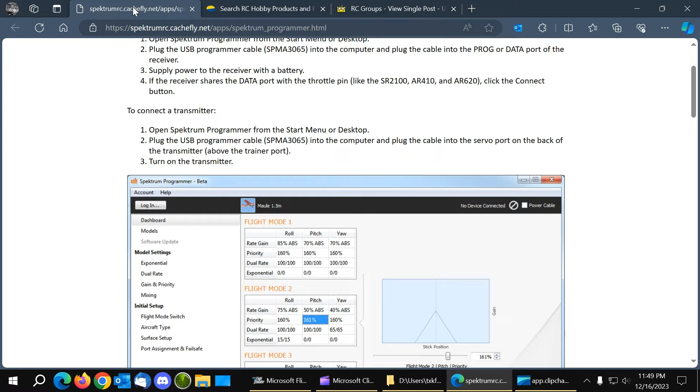He's the one that figured out how to do the reprogramming on AR636s, and also wrote this software to reconfigure the smart receivers that came after the AR636. So what I'm going to do is I'm going to run the Spektrum Programmer software. And so there's no Timber here, or not Timber, but Valiant.

And since the receiver's in the airplane and it has servos connected to it, the servos would draw too much current to run it off of the USB port. So instead of checking that box, I'm going to plug the battery in on the plane. And of course, having this software up and running when I plug up the receiver to power, the receiver is going to automatically connect. So you'll see that in a second.

Okay, so it connected. It shows cable and device connected up here, and it's showing us this. Now you need to be real careful with this menu right here, this box. You want to use the device settings, but you don't want to overwrite a model that you already have. So new model is okay. If it had the name of one that already existed, then you would click show all, and you would pick new model instead of one of these and tell it use device settings.

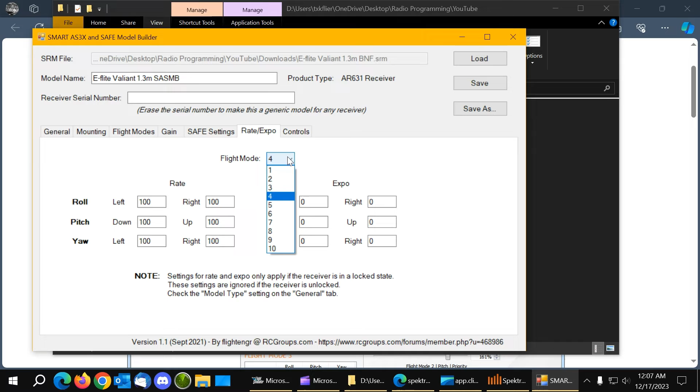So that's that. And then the control tab. Horizon, on bind-and-flies, you have to leave the servo reversing set to normal. You don't want to reverse any channels in your transmitter. They do the reversing in the receiver.

However, if you reset the receiver and program it from scratch yourself, you have to reverse any channel that's backwards when you move the sticks, and then run the relearn servo settings in forward programming so that it tells the receiver that you've reversed a channel and what the sub trim is and stuff like that.

But from looking at this, I know when I program this receiver from scratch manually, that I'm going to have to go into the aileron channel and reverse it, and go into the rudder channel and reverse it in my transmitter. So, I might make a note of this, or I'm just going to check the airplane, and look and see what's reversed and change it, and then do the relearn servo settings in the receiver.

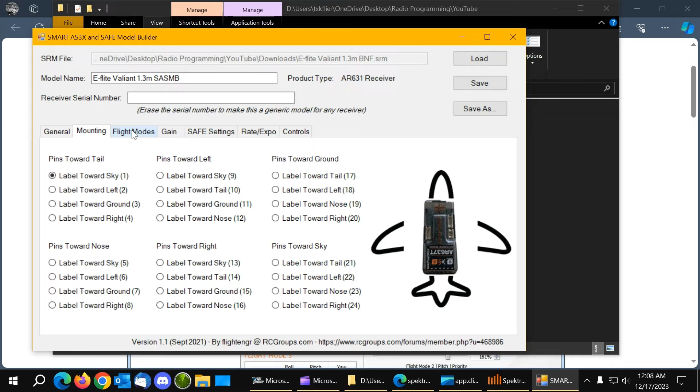So to set this up for me, I'm going to use channel 7 because it's a 6-channel receiver. 3 flight modes. I'm going to unlock it. Safe is enabled. Mounting, I don't need to change it. Flight modes, what I do on mine is flight mode 1, safe is inhibited and AS3X is on. And these don't need to be on. And these don't matter.

So flight mode 1 in my setups is low rates with AS3X because I put them on the same switch. The dual rates and the flight modes in the receiver, I put them on the same switch. I don't have a way to turn the gyro off. I don't really want to turn it off. And in flight mode 2, it's going to be AS3X and doesn't need these 3, and these don't matter.

In flight mode 3, this is where I'm going to turn self-level on and AS3X on. So my safe mode is going to be on the opposite end of the switch. It's going to be flight mode 3. And I can just leave high throttle disabled instead of changing it to 0 in that other screen. But you can leave it active.

Now the bank angle, I've got to set these. The slower the airplane is, the lower these can be, because a slow airplane doesn't need to bank much to turn in the width of a field. The faster it is, if it's an EDF, then you're going to need to put 85 degrees here so that the wing is almost vertical when you got the stick all the way over against the stop.

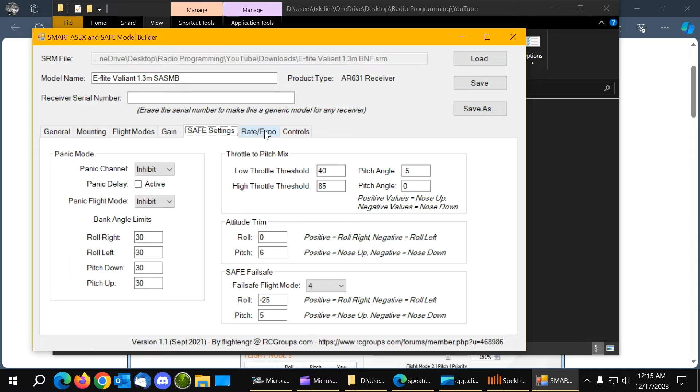Okay, panic doesn't matter. And this is already set to 0. And that's -5. We've already done this screen, so we're good here. And then these don't matter because the receiver is unlocked. So now I'm going to highlight the name and hit Control-C and copy it. And then I'm going to do Save As, and I'm going to do Control-V and paste that name in here and save it. Now I can get out of this.

I can go back to the Spektrum programmer, and I can import that file, which is right there. And there's the file. Now, to write that file to the receiver, I click Select, and it just wrote it to it. So now my receiver's programmed the way I want it instead of the way Horizon did it.

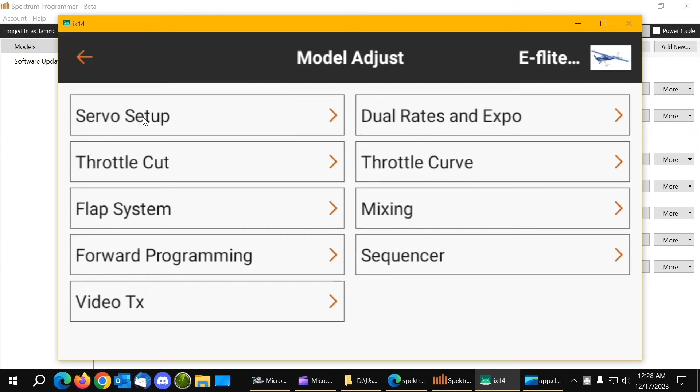The next thing I need to do is go into the transmitter settings and reverse the channels that Horizon had reversed in the receiver. So we go to the transmitter and go into Model Adjust and Setup, Servo Setup, and reverse the ailerons and the rudder.

And then in dual rates, what I do is I use switch B position 0 as low rates with AS3X. And normally I set the expo to 1/4 to 1/3 of what the rate is. And so I would set this to like 15 or 20. And then in the mid position, that's my high rates, which is 100%. Then I would set that to like 25. And then the third position is safe mode. And I would also set these to 25.

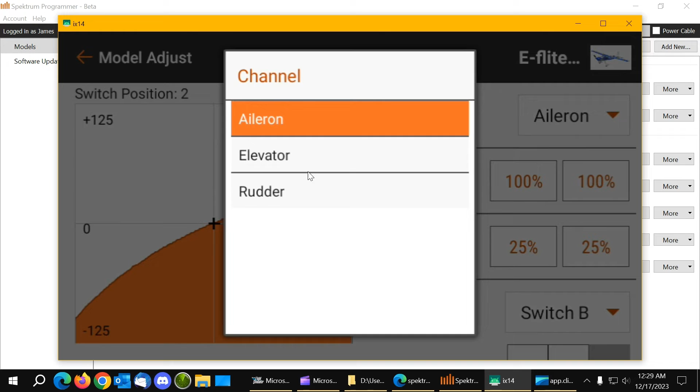So now you've got low rates with 70 and 20. High rates is 100 with 25%. Safe mode is 100 with 25. So now we go to the elevator. And this is low rate. And I would set this to maybe 75. Let's go to 80. I don't like to turn the elevator down to 70 on the first flight. So 1/4 of 80 would be 20. So we'll slide this over to 20.

And then mid position is high rates. And we'll set that to 1/4 of 100, which is 25. And then we'll go to the safe mode switch setting, and we'll set those to 25. And so now we've got 80 and 20, 100 with 25 in high rates. Safe mode's 100% with 25.

So now we go to the rudder, and the rudder, I'm going to use 75. The book value is 70, but I'm going to use 75. And then I'm going to use 20 here. And high rates, mid position, I'm going to use 25 there. And then safe mode, I'm going to set that to 25% expo.

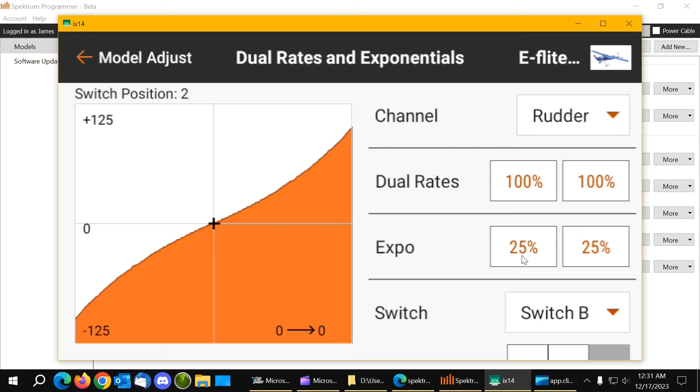So now we've got 75 and 20 for low, 100 with 25 for high rates. Safe mode is 100 with 25. So that's the dual rates.

So now, anytime you go into the servo setup and change the direction or the travel or the sub trim on a smart AS3X SAFE receiver, you need to go into forward programming and, let's see, relearn servo settings. It's under system setup. So you go to gyro settings, system setup, and click relearn servo settings. Click apply and then complete. And now we've told the receiver how the transmitter is set up. You must do that anytime you make a change in the servo settings.

Now looking at the gyro settings, AS3X, flight mode 1, we've got 25, 35, and 45. High rates, we've got 25, 35, and 45. Oops, it's not changing flight modes. Now let's see, what did I do? F mode setup.

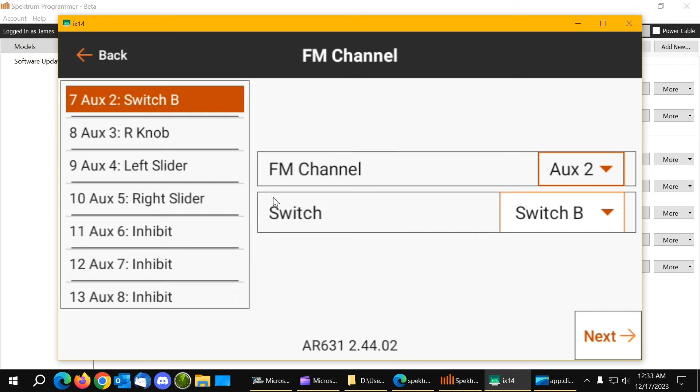See what channel I'm on. We're on switch B, we're not on C. I had it set to the separate switch from the rates because I had it set up for one position that had the gyro disabled and one that was AS3X and one that was safe. So I always put the receiver flight modes on B so that they change with the rates.

So now, flight mode 1, flight mode 2, safe mode. Okay. So here's where you got to do all this flipping. You got to check every flight mode when you do this forward programming. So this is low rates, which is my flight mode 1. AS3X is on, safe is off, panic's off. All these mixes are off. You don't need them.

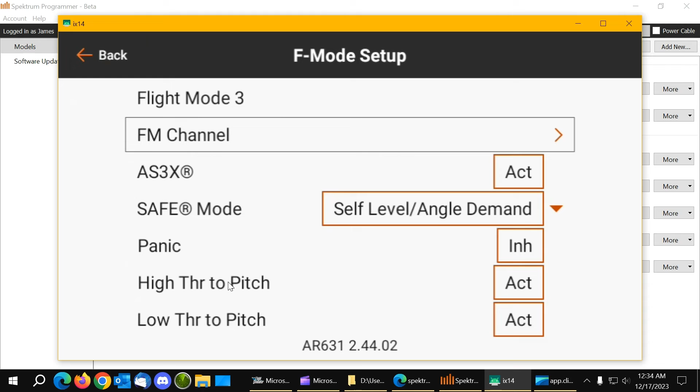The middle position is high rates. AS3X is on, safe is off. All of these are off. Flight mode 3 is my safe position. And so AS3X is active like it ought to be when safe is. And we got self-level angle demand. Panic is inhibited. The throttle to pitch mixes are both active, but I've got the high throttle set to 0 so that my plane doesn't climb at full throttle.

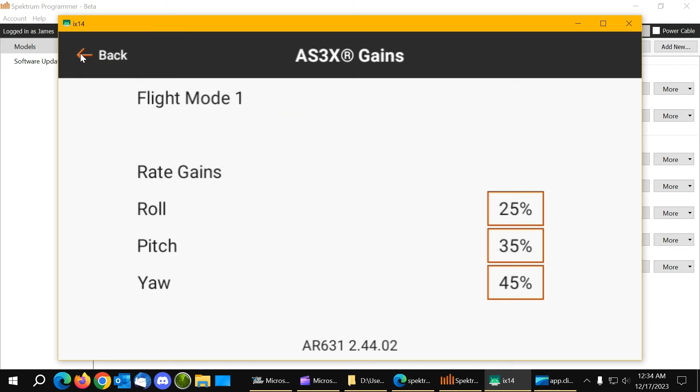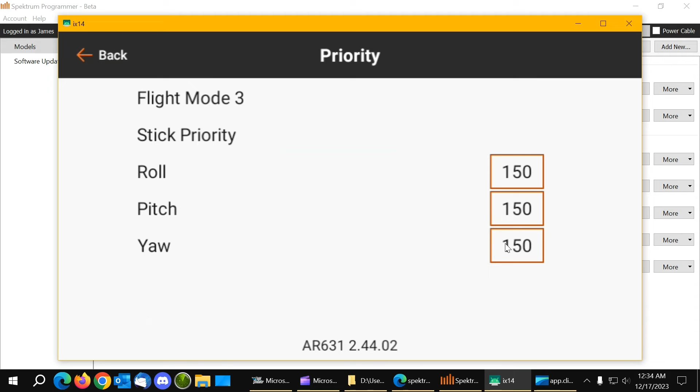So we go back, we go to AS3X settings again, and flight mode 1, we've got our 3 rates. Flight mode 2, same 3 rates. Safe mode, same 3 rates. So that's those. And then priority, flight mode 1, which is low rates, they're all 150. High rates is flight mode 2, and they're 150. And flight mode 3, which is safe mode, they're all set to 150. So there's many screens you got to go through and flip the switch to all 3 flight modes.

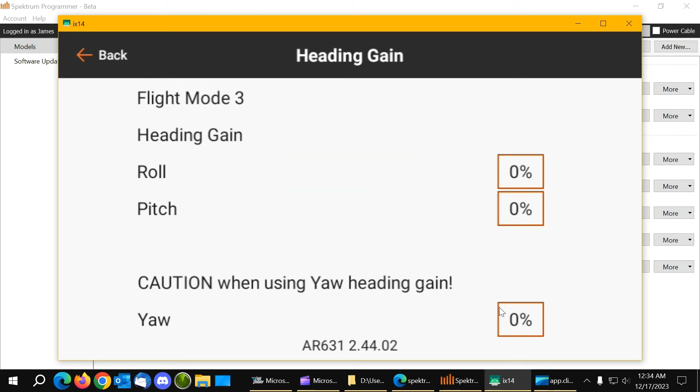Heading gain is 0 because I don't use it, although it does work good, but you don't want to put it on the rudder. So they're all disabled like they should be. And this is where you change it from fixed to adjustable gain, but as we saw in Spektrum Programmer software, they were not set to adjustable, so they are set to fixed. And here again, you got to flip the switch and look at every flight mode. So there's high rates, and they're set to fixed, and safe mode they're set to fixed. So you've got to flip the switch in just about every screen that shows flight mode at the top.

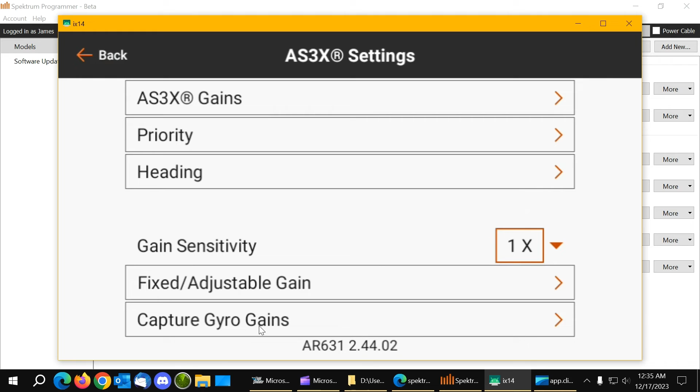And of course, this is where you would capture the gyro gains if you were using a knob on a separate channel to adjust the gains, but I don't do that. It's so easy to change the gains. You can make a lap or two around the field and see how it flies. You can land and hit the throttle cut and make a change and take off and go again or try it again with different gains. So I don't use variable gains.

Here's the safe gains. In flight mode 1 is AS3X without safe. This is flight mode 2, which is high rates, AS3X, so there's no safe. And then flight mode 3 is my safe mode, and there's my roll gain and my pitch gain. And then angle limits. Flight mode 1 doesn't use them because safe is disabled. It's my low rates with AS3X. Flight mode 2 is high rates with AS3X and no safe.

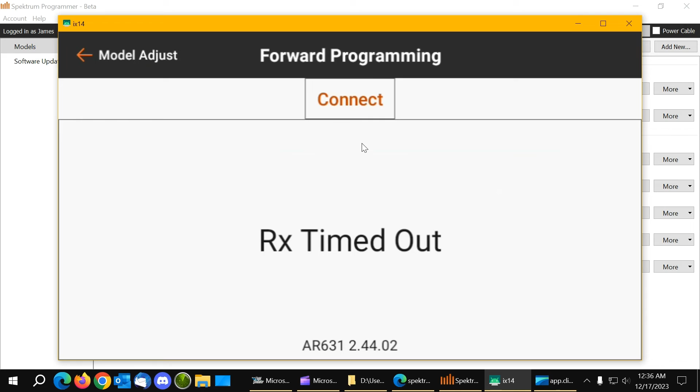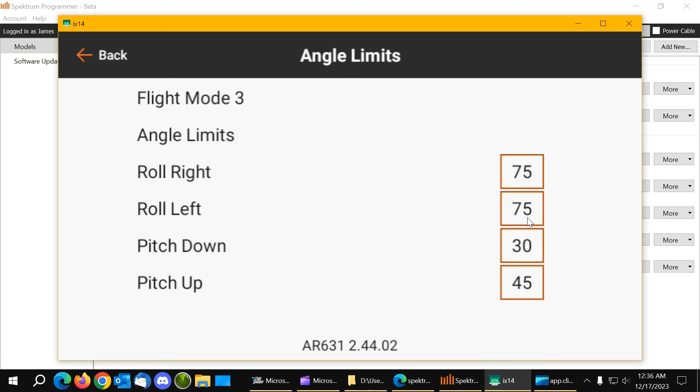And okay, sometimes it does that. It bails out on you. Okay, flight mode 3, there's my safe gains. What was I doing? Angle limits, wasn't I? Okay, flight mode 3, there's my angle limits. So 75 left and right, 30 down, 45 up.

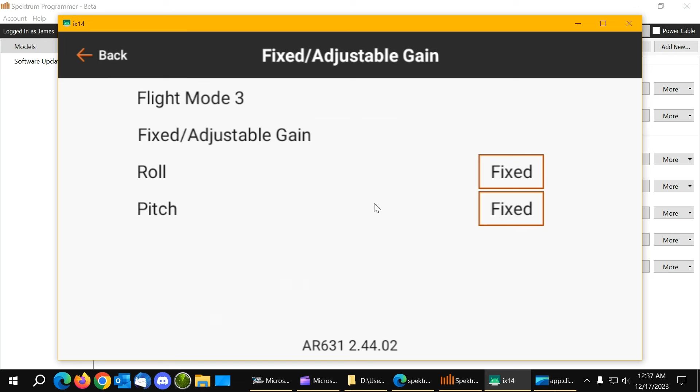Fixed adjustable. These default to fixed, so you know they're going to be set correctly. Whereas if you do a first time setup on one of these receivers after resetting it, the AS3X gains are going to be set to adjustable. And if you don't set up a gain channel, you're not going to have any gains. So you got to make sure you set the AS3X gains to fixed if you're not going to set up a gain channel.

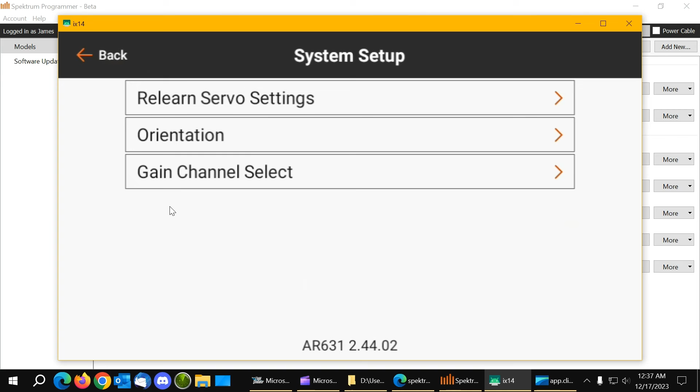F mode setup, we were already in there, but it's still good. System setup, orientation should be correct. Gain channel select, I'm not using it. Safe panic mode, this is where you can enable it, but it's inhibited. You don't need it if you've got safe. This is the throttle to pitch mix, and you see I've got it set for 0 on the high throttle and -5 on the low.

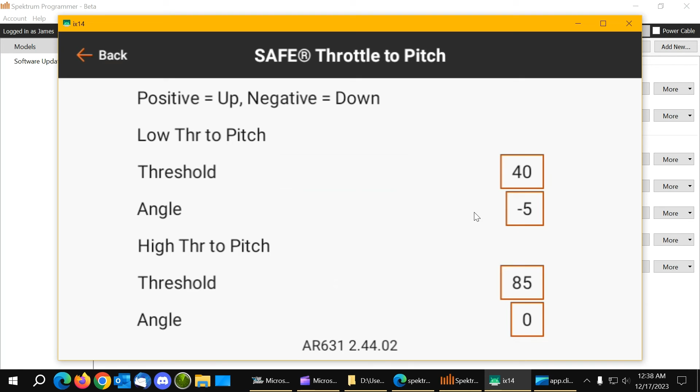Attitude trim, this is where you adjust these values to make the plane fly level. If it turns a little bit, you need to adjust the roll, but normally that's 0. And the pitch, set it to 5 or 6 or something. It depends on the airplane. It depends on how the receiver is mounted in the plane too. If it's not level with the center line of the fuselage, then you're going to have to adjust this. Now there is a way to capture. You can capture the attitude using that option, and I don't use that generally.

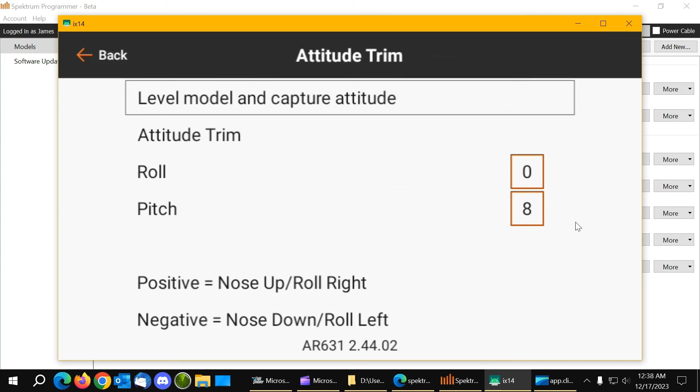It's showing that it needs 8, but it's sitting on its tail wheel, so it's not level. That's one thing. A tail dragger, you got to raise the tail up to where the plane's level before you do the capture attitude trims. And then fail safe is flight mode 4, as we saw, and the fail safe angles -25 and 5, so they're all good.

It's easier for me to go through Spektrum Programmer software and set all this stuff than it is to go through forward programming, because you have to go back and forth and make sure you've checked every box. I don't use the utilities generally to copy one flight mode to another. This is where you set how many flight modes there are, but it needs to be set to 2 or 3 depending on the positions of your switch.

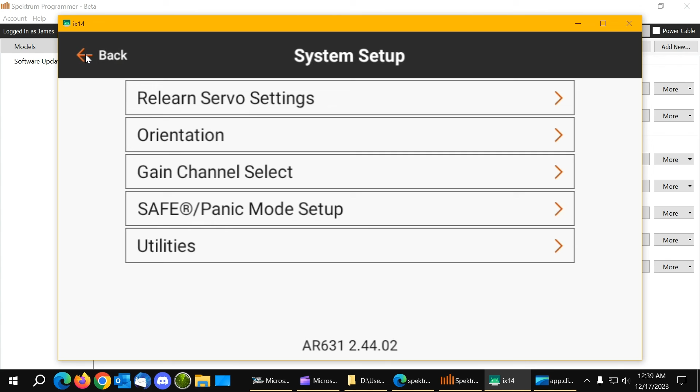And you can relearn servo settings as much as you want to, because it won't hurt anything, but you need to pre-flight the airplane before you fly it. And of course, take the prop off anytime you're working on the setup of your plane so that you don't accidentally get sliced by it or have it fly off the table. So I think that's about it. So this fail-safe thing here, I wouldn't mess with that.

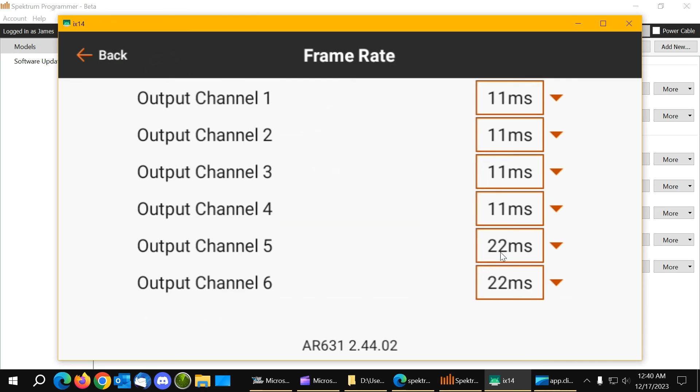The bind, you can tell it to go into bind mode here, but it's already bound. Frame rate, these need to be set to 11 milliseconds if you've got digital servos. If they're analog servos, they need to be set to 22 milliseconds. This is between the receiver and the servos. The rate from the transmitter to the receiver may be 22.

Factory reset, this is where you wipe out the settings in the receiver, and it will go into first time setup when you go into the menu. And so you don't want to factory reset it unless you really want to. You can restore the settings from backup if you saved them to the backup. Of course, Horizon did save the original settings to backup. So if I click restore from backup, it will put the receiver back like it was when it came out of the box.

I don't generally save the settings to backup, but you could. That way you've got a copy of the last configuration you flew. In case you change something and it doesn't fly right, you can go back to what you had before. But I generally don't worry about that too much. And of course, it shows you the firmware version here, which I need to update the firmware using the Spektrum programmer.

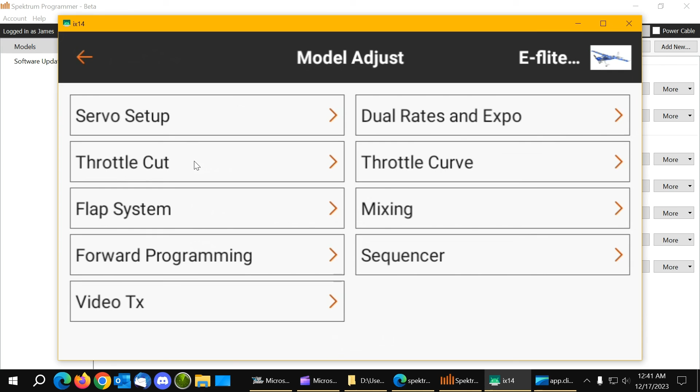So we can do that. We can go back to here, go to software update, and we can tell it to install 2.46.1 and say update. So it's writing the new firmware to it.

Okay, now it says that the settings on the device don't match what's in my computer. Well, of course not. I just changed a bunch of stuff using forward programming. So now here is where I need to be really careful, because I don't want to overwrite the original settings. The BNF was what I read out of the receiver when I first hooked it up. So I need to say show all. I need to select new model, and I need to say use device settings.